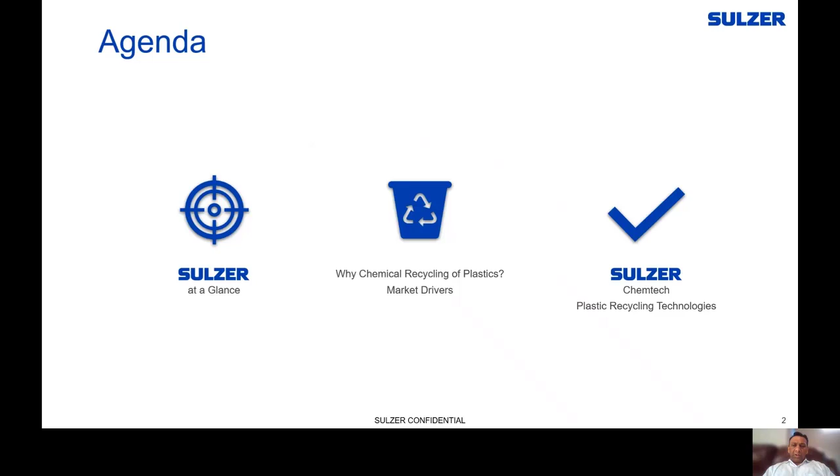Sulzer Chemtech has a diverse footprint. We offer equipment and services which cater for different applications. On the technology and licensing side, we have an extensive portfolio both in the refining as well as petrochemical arena, and we offer these processes as technology licenses, which include any proprietary equipment, catalyst, or chemicals required in the process.

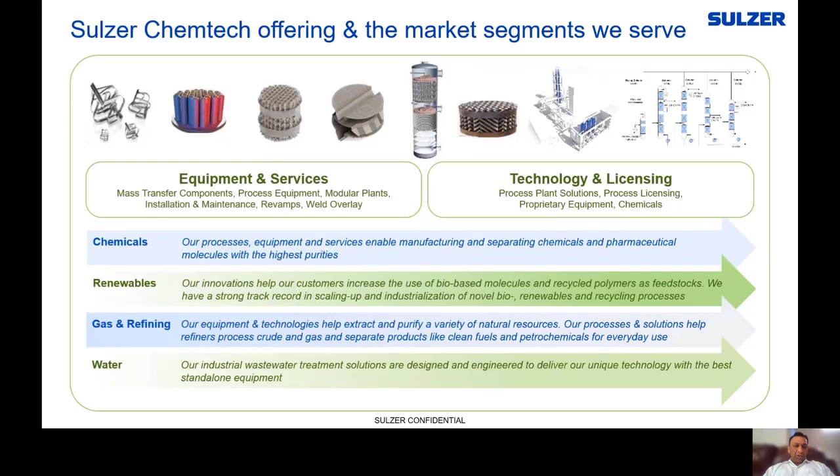We cater to different market segments. Chemicals, this includes acrylic acid, MDI, and it also includes the specialty chemicals area. Renewables, this includes bioplastics like PLA and plastics recycling, which is the focus of today's webinar. Gas and refining, and last but not the least, the water segment, where we offer solutions for industrial wastewater treatment.

Why has plastic recycling gained so much mainstream attention? Looking at the graphic shown on this slide, approximately 330 million tons per annum of virgin plastics are produced every year, out of which a staggering 260 million tons per annum land as waste plastics. Now, these waste plastics undergo different routes.

25% are incinerated, which lead to greenhouse gas emissions. 40% are landfilled, which are an environmental hazard on their own accord. And 20% are beyond any human control - these are plastics floating on the ocean or scattered on the land masses.

Focusing on the recycling rates, only 12% are recycled by mechanical means, and chemical recycling accounts for a minuscule less than 1%. Thus, one can see plastics recycling has become an environmental necessity.

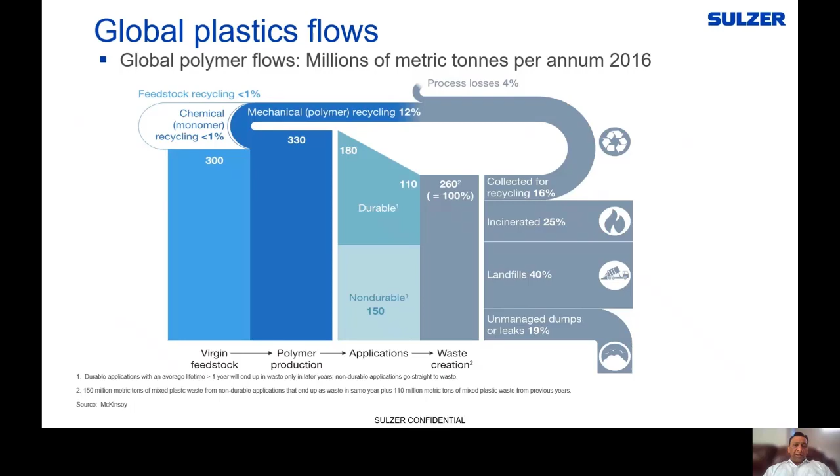Because of its environmental necessity, there are drivers shaping up both at the legislative as well as at the market level. In Europe, the first plastics tax has been put into place, which is 800 euros per ton on the basis of non-recycled plastics. The European Union has imposed this tax on the member countries, but the member countries have been left with their own choice as to what mechanisms they want to implement to promote the plastics recycling.

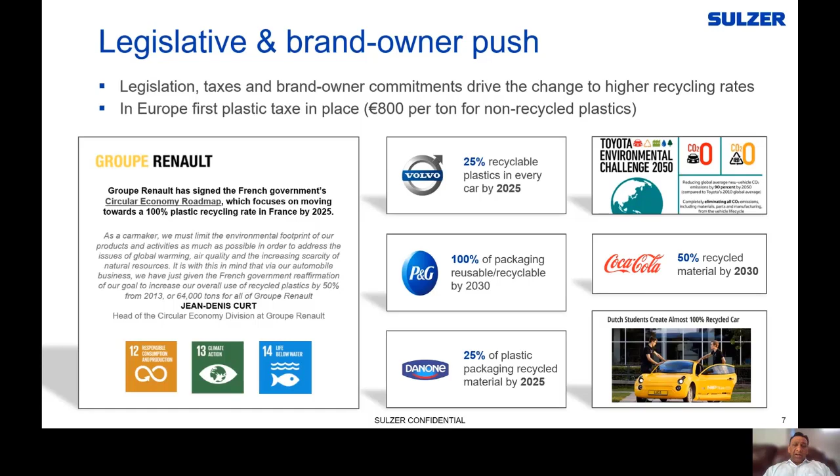On the market side, different brands are demanding more recycled content. Companies like Coca-Cola, Nestle want more recycled content in their bottles.

Moving on to the recycling categories, there are two main categories, the mechanical and the chemical recycling. Mechanical recycling dominates, but chemical recycling is picking up steam, and there are differences in both the approaches. In case of mechanical recycling, the plastics feed needs to be quite clean and it needs to be quite sorted. This is because small amounts of polymer dispersed in the matrix of another polymer can cause issues with mechanical recycling. A classic example is small amounts of PVC during the PET processing.

Chemical recycling, on the other hand, can accommodate a wide variety of feed, although this feed needs to be sorted only to a certain extent. So that's an advantage chemical recycling brings to the table.

Polymer degradation: what happens during the mechanical recycling process is that with every cycle, the properties of the polymer degrade, and there comes a time that the polymer cannot be used for its intended application. Chemical recycling, on the other hand, since the waste plastics are being broken down into hydrocarbon molecules, does not suffer from this polymer degradation limitation. Those hydrocarbon molecules can be fed into a downstream polymerization process to produce a polymer which rivals the properties of virgin polymer.

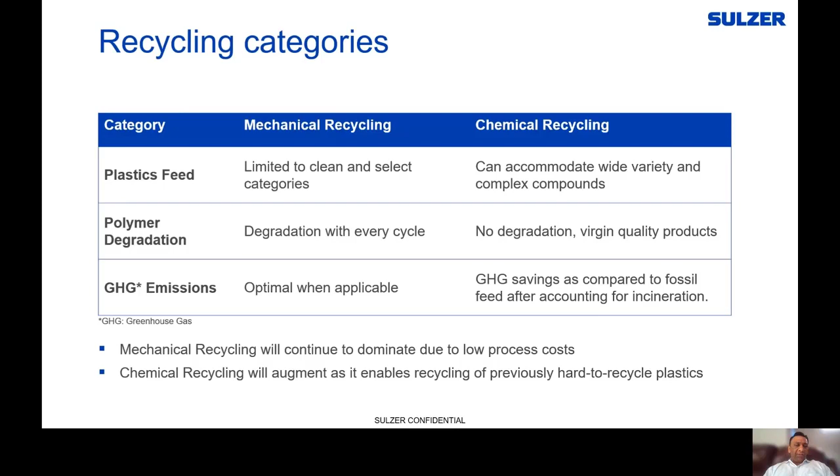Our view with respect to the recycling space is that mechanical recycling will continue to dominate. However, chemical recycling will gain significant market share, and this is what is highlighted on this slide.

If one focuses on the graphic on the left-hand side, one can see that the polymer demand is expected to grow at a healthy rate for the next 3 decades. This is because of the population growth that is foreseen in the next 3 decades, and at the same time, the middle class upliftment being seen in developing countries.

Focusing on the table on the right, one can see that mechanical recycling will continue to dominate the mix, and it is projected to increase approximately 3 times. However, chemical recycling, which is shown by the red dotted box, will increase at an exponential rate, and this is because of the advantages it brings to the table.

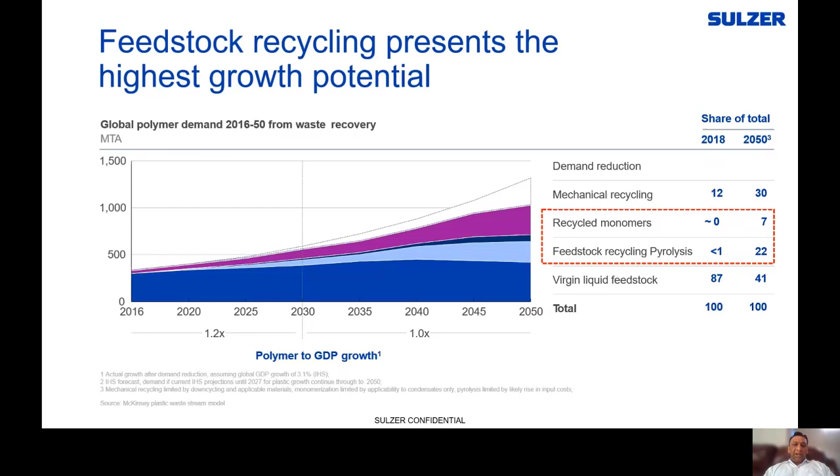Now, what are the different polymer recycling methods?

Pyrolysis is when plastics are heated up to certain temperatures, typically anywhere from 300 to 400 degrees C, in an inert atmosphere. It can be done thermally or in the presence of a catalyst. When catalyst is used, as one can imagine, the temperatures are relatively lower.

In the case of thermal pyrolysis, a broad product slate is obtained, starting from naphtha to distillate all the way to the heavy fraction. However, in catalytic pyrolysis, a main advantage is that the product slate can be tailored, targeted more towards cyclic, naphthenic, or aromatic molecules, depending on the customization of the operating conditions as well as the catalyst.

If pyrolysis is applied on polystyrene or PMMA, one obtains a monomer-rich product slate from which styrene or MMA needs to be recovered.

Depolymerization is a method where an external agent is added to break the polymer into the starting monomers. This is what is used for PET chemical recycling, or for polycarbonates, polyamides, or polyurethanes. A major limitation of this approach is that it can only be applied for condensation polymers. For addition polymers, which form the majority of the plastics pool, this approach cannot be applied.

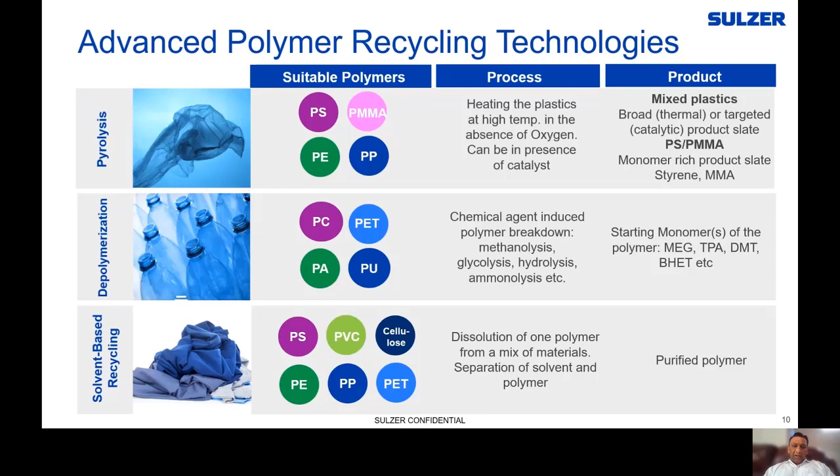Now, what is Sulzer's portfolio in the plastics recycling arena? We have technologies for PET and polyamide recycling, wherein we offer expertise for the downstream monomer separation.

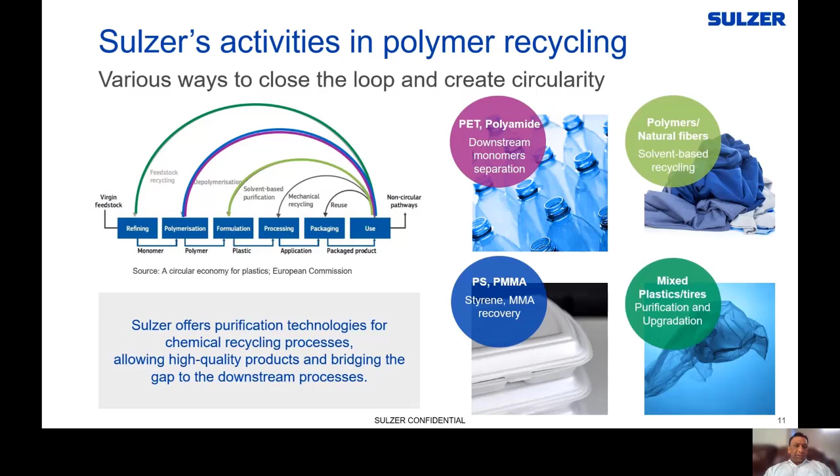In the case of polymers or natural fibers, we offer solvent-based recycling processes. For polystyrene or PMMA, we offer styrene/MMA recovery processes for the recovery of the monomer, which comes out of the depolymerization section. And lastly, in the case of mixed plastics, or even waste tires, we offer know-how and processes for purification and upgradation. Now, we will touch upon each of these segments in the subsequent slides.

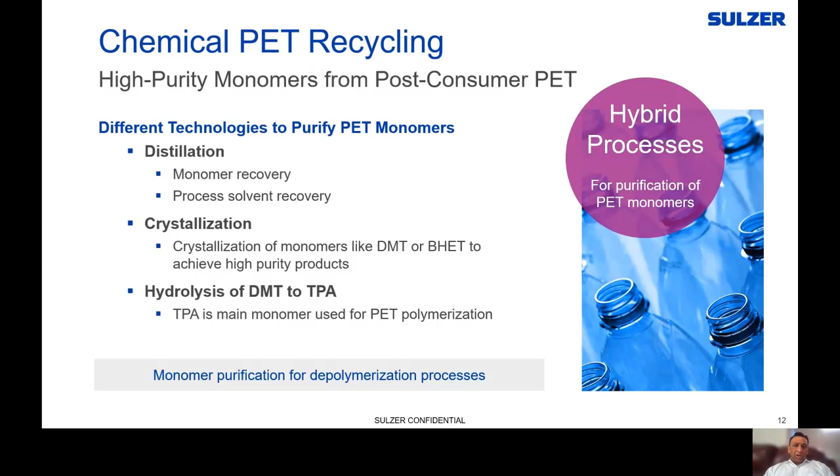PET chemical recycling: over here, we bring in our know-how on distillation and crystallization for the separation of the monomers obtained from the depolymerization of PET, which can be practiced either by methanolysis, hydrolysis, or glycolysis.

For polyamide chemical recycling, we offer a hybrid approach downstream of the depolymerization section for the recovery of caprolactam. We are able to produce the highest grade caprolactam, meeting and exceeding all required properties. A crystallization block is used downstream, and an important function of this block is to remove impurities which cannot be removed by distillation.

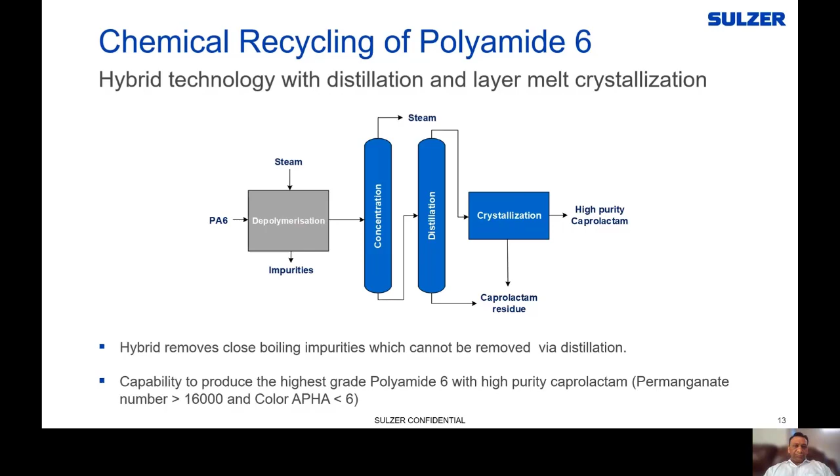Solvent-based recycling: here, for the separation of the polymer from the solvent, we offer a unique devolatilization technology. A significant advantage is that it can be applied over a broad range of viscosity for the solvent and polymer mixture, and one is able to get solvent levels down to very low ppm levels in the recycled polymer.

As one can imagine, during solvent recycling, an important criteria is to recover the solvent. Over here, we offer different approaches for solvent purification as well as recovery.

An example of our industrial activity in this segment is the Worn Again venture. Worn Again is a UK-based startup which has developed a process for the recycling of end-of-life textiles. Sulzer is a major shareholder and is bringing both knowledge as well as equipment know-how for the scale-up of this Worn Again process to commercial level.

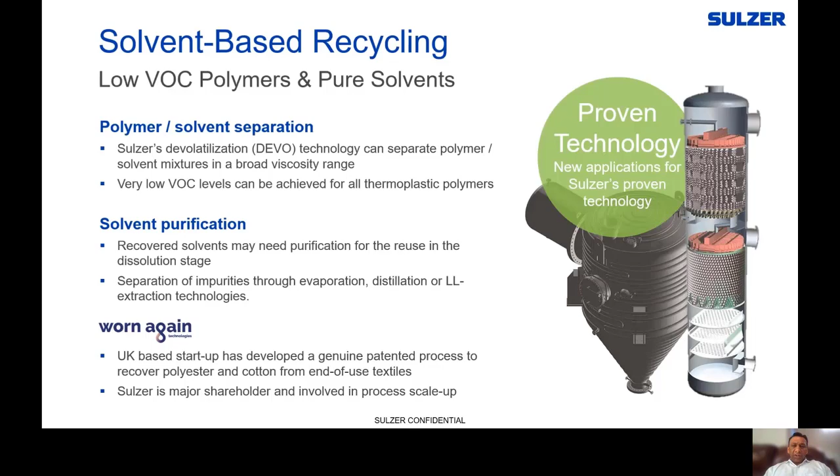The reason for developing this unique scheme is, number one, despite the employment of state-of-the-art sorting methods, non-styrenic plastics can lead to impurities left in that crude styrene oil, which cannot be removed by conventional distillation. Number two, during the depolymerization process, certain impurities like phenylacetylene or orthoxylene can be produced, which co-boil with styrene. These impurities again cannot be removed by conventional distillation. Thus, there is a need to develop a unique scheme.

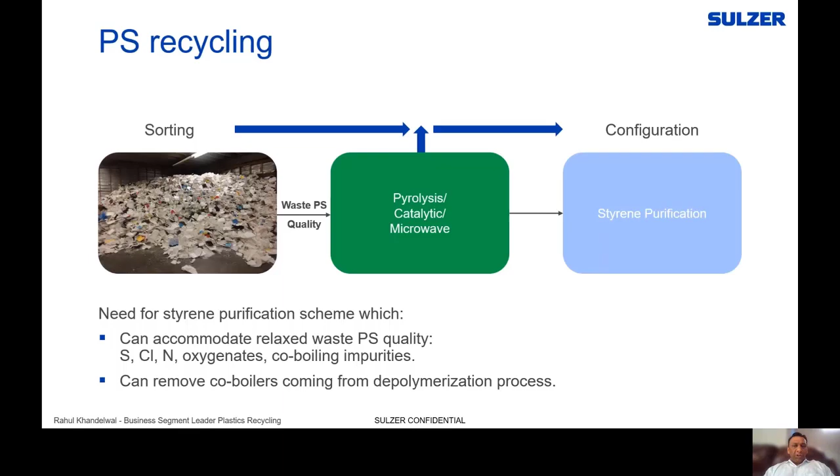What we have developed here is a hybrid approach. We use distillation, which can be a divided wall column or a set of two columns, to produce an impure styrene cut. We don't go all the way to 99.7 or 99.8% styrene purity. Rather, we go for 99% purity coming from the distillation block, and we let all the co-boiling and close-boiling impurities come along in this impure cut.

This impure cut is then fed into a proprietary crystallization block. This is melt crystallization, very simple and robust operation. No centrifuges involved here. And the elegance of using crystallization here is that it is able to remove impurities which cannot be removed by distillation. We have demonstrated with real life samples that we can achieve purities exceeding 99.95% on styrene, and all other impurities, phenylacetylene, xylenes, EB, cumene, to extremely low levels. We in fact exceed the ASTM specs.

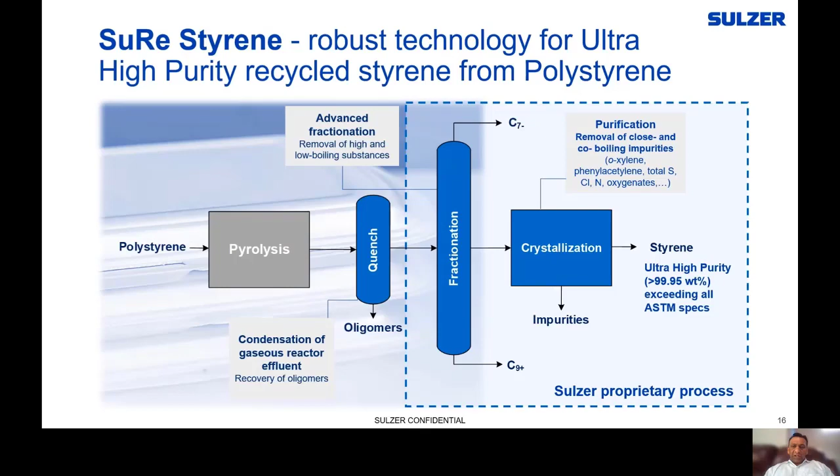Now moving on to mixed plastics or waste tire recycling. Again, downstream of the pyrolysis block, we can offer the full portfolio, starting from the quench section. We can offer customized designs for the quench section, along with supplying those designs under a skid fabrication approach.

Now, what happens with these mixed plastics pyrolysis oils is that because of the nature of the feedstock, certain contaminants will invariably be present in these pyrolysis oils. These are sulfur species, nitrogen species, oxygenates, high level of olefins. Now, these contaminants need to be removed before these oils can be used for downstream valorization. And this is where we offer a hydrotreating based approach. Our hydrotreating technology is based on a unique concept, which will be talked about in subsequent slides.

That concept relies on liquid recycle. This technology is called MAXFLUX, and we project anywhere from 30 to 40% capital as well as operating expense savings, and the ability to remove all the contaminants which were mentioned earlier.

Now, once these contaminants are removed, this pyrolysis oil generally will go through a distillation step from which different cuts would be obtained to go to relevant destinations. We at Sulzer Chemtech have experience in dealing with the separation of these pyrolysis oils. Sulzer Chemtech in 2020 put into operation a distillation skid for a reputed recycler in Europe called Quantafuel. The capacity of the skid is approximately 20 kTA.

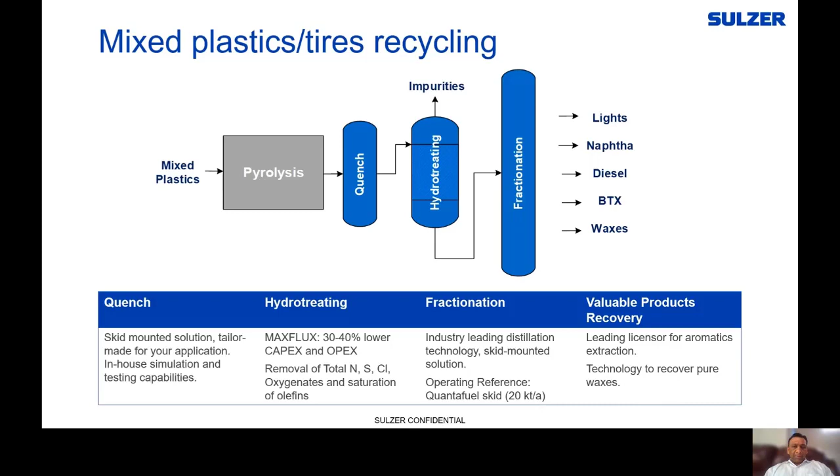Now, what is MAXFLUX? This is the hydrotreating technology which was mentioned in the earlier slide. Typically, if one looks at the carbon range of these pyrolysis oils, a conventional hydrotreating approach would involve a trickle bed reactor. In a trickle bed reactor, you have a vapor recycle because one needs to recover the hydrogen in the process. Because you have a vapor recycle, the hydrogen needs to jump from the gas phase to the liquid phase before it can start participating in hydrotreating reactions. And as one can see, there's a mass transfer limitation involved.

What is done differently in MAXFLUX is that instead of a vapor recycle, we have a liquid recycle. And this brings in significant process as well as economic benefits, which are highlighted in the next slide.

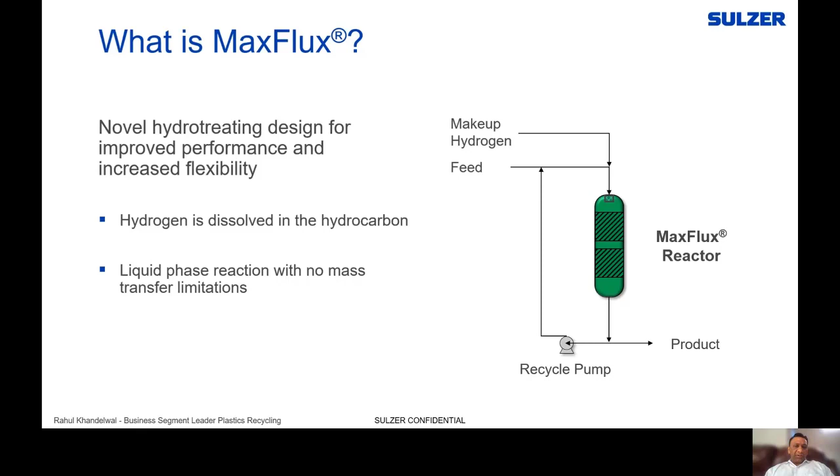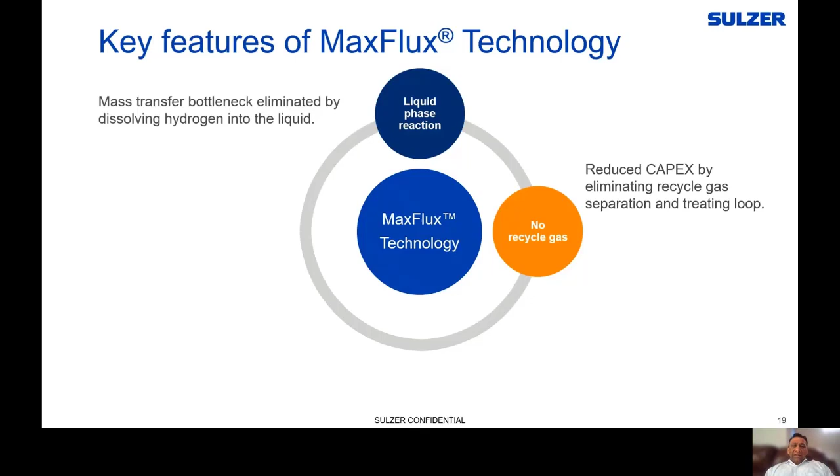First and foremost, the mass transfer limitation goes away. Secondly, since there is no vapor recycle loop, all high pressure equipment like recycle gas compressors and high pressure amine contactors go away from that scheme. And this brings in significant capital savings.

There is lower operating expense, and this is predominantly because the vapor compression power of the recycle gas compressor has been replaced with the liquid compression power in case of MaxFlux. The other operating expense savings comes from the fact that since the reactor outlet is recycled directly back to the feed, there is no need for a feed effluent exchanger, and thereby any heat loss associated with that feed effluent exchanger goes away from the picture.

One of the main limitations of a trickle bed system is that because hydrogen is jumping from the gas phase to the liquid phase, there will invariably be two-phase formation in the reactor. Wherever you have two phases, there will be hotspots. Wherever there are hotspots, there will be cracking. And wherever there is cracking, not only will it decrease the yield of the product, but most importantly, it will decrease the life of the catalyst because of coking.

In case of MaxFlux, since it's based on a liquid recycle concept, the reactor always operates liquid full, and thus all these limitations go away from the picture.

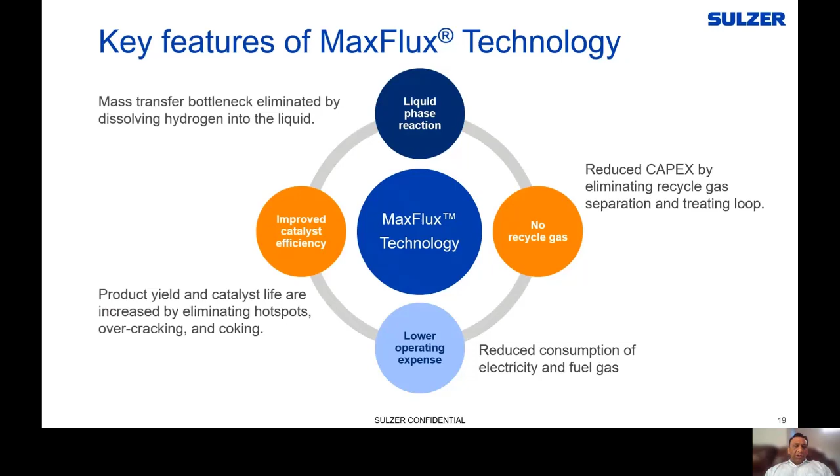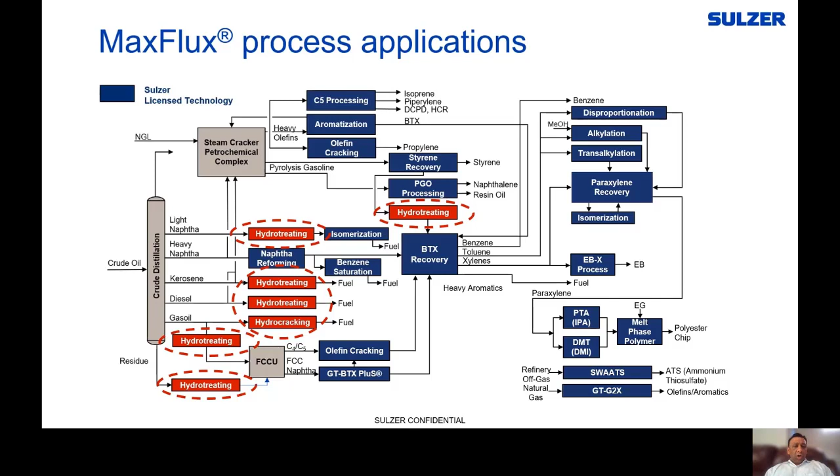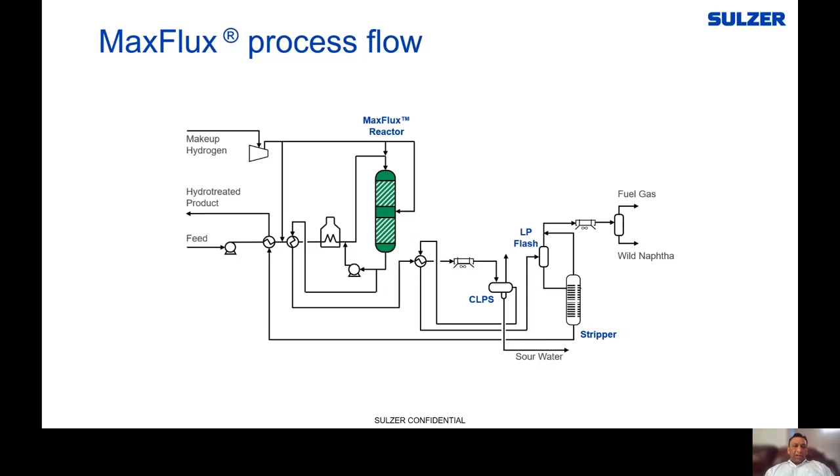Now, MaxFlux as a technology has been deployed for different refinery applications, starting from naphtha all the way to atmospheric residue. This is what the process scheme looks like. As one can see, there is no vapor recycle loop, and the reactor outlet is recycled directly back to the feed.

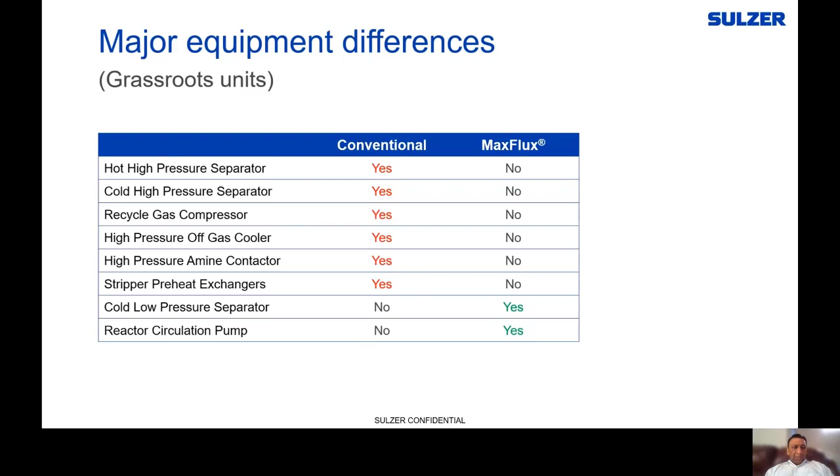These are the main equipment differences between the conventional trickle bed and the MaxFlux scheme. As one can see, in the conventional scheme there is quite a bit of high pressure equipment like recycle gas compressors or amine contactors, which lead to capital investment. In case of MaxFlux, all this equipment goes away. There is addition of two equipment: one is a cold low pressure separator, which is a minor contribution to the capex, and the other is a critical piece of equipment, which is the reactor circulation pump.

Thus, in summary, the main advantage MaxFlux brings to the table for the hydrotreatment of these pyrolysis oils is the capital savings. And these capital savings are of special emphasis for the plastics recycling area. This is because the throughputs experienced in the refinery or petrochemical sector are not seen in the plastics recycling space, so an economical solution is required.

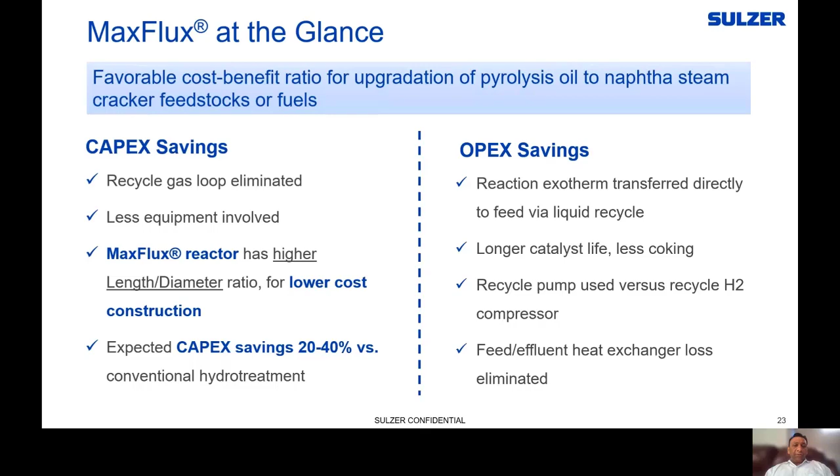Operating savings, as was explained in the earlier slide, also come into the picture, along with the other process benefits of increased catalyst life and less cracking.

Now shifting gears to a different topic. One of the main questions being looked into in the industry is how the pyrolysis oil obtained from mixed plastics, which is the largest category in plastics recycling, should be valorized.

Now there are predominantly two different routes. One is the refinery route, and over here one can leverage a lot of existing infrastructure, like bottom of the barrel units or FCC. However, one needs to pay special attention to the contaminants present in these pyrolysis oils so that they don't affect the performance of these units. In general, we believe there will be a blend wall limitation of anywhere from 5 to 10% for co-processing these pyrolysis oils along with the fossil feedstock in these bottom of the barrel units.

Another main criteria to take into account is that the production profile of the overall unit shouldn't be affected because of this small amount of pyrolysis oil addition. In other words, one does not want a 50,000 barrels per day FCC unit's profile to be affected just because 1,000 or 2,000 barrels per day of plastics pyrolysis oil need to be co-processed.

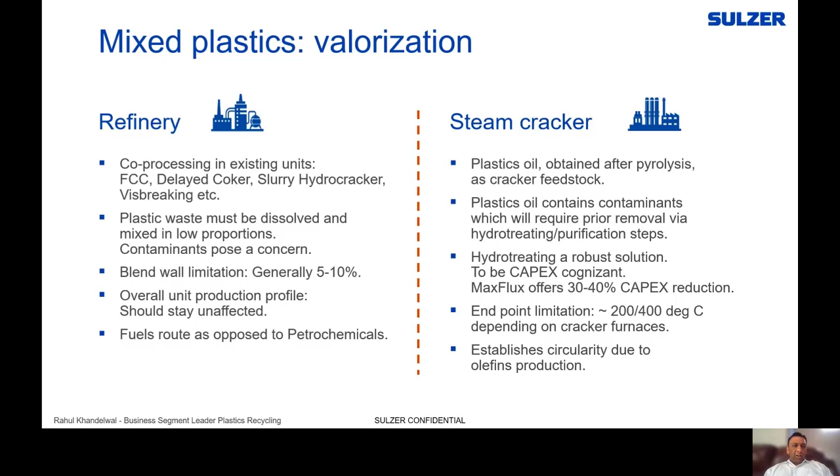Now, in summary, plastic recycling, as was showcased earlier, has become an environmental necessity. It's no longer a fashion, this has become the need for today. There are activities being taken both at the government level as well as at the market level, but these activities need to step up to increase the recycling rates.

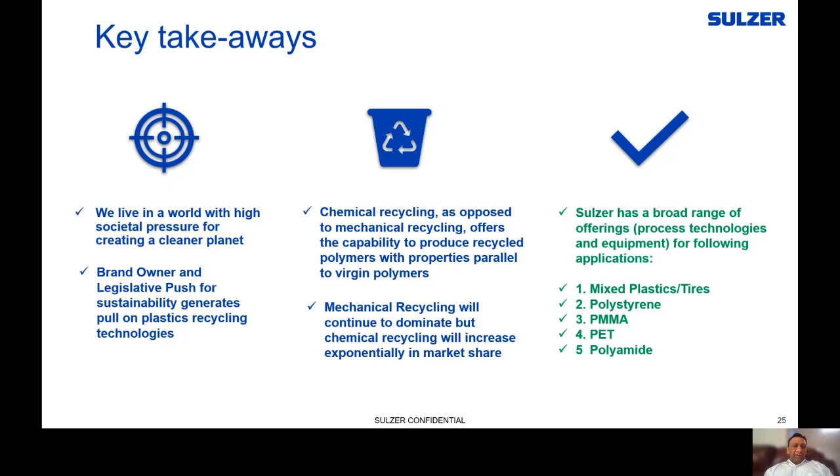Mechanical recycling will dominate, as was explained earlier, but chemical recycling, because of the advantages it brings to the table, will gain significant share. We at Sulzer can offer a broad range of solutions, starting from equipment all the way to process know-how for different recycling categories, as has been shown on this slide. With that, I conclude my presentation, and I would be happy to answer any questions. Thank you.